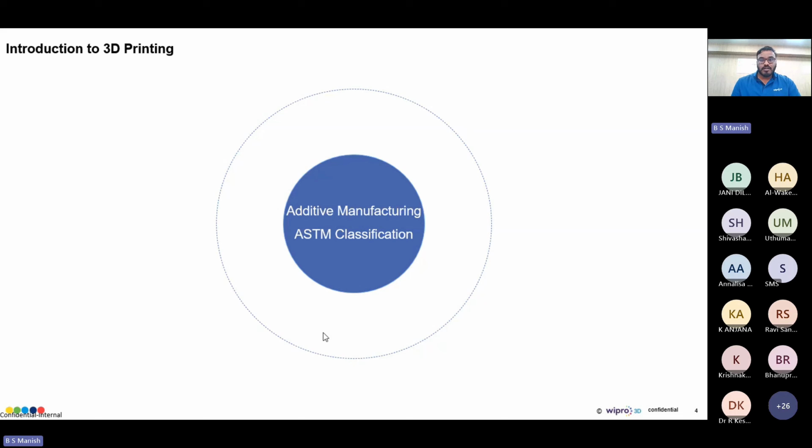So to begin with, I want to brief you a little on 3D printing altogether. We all know additive manufacturing, or AM, is changing the way we think about how we make things. For people who are very new to AM, I'll take it a little basic and go across all the different categories of AM as classified by ASTM. It is categorized into 7 major categories, and each one works differently.

Today, I'll walk you through all 7, how they work, where they are used, and why they matter. I will specifically focus on polymer technology, more on material extrusion, and then take you through various case studies and some of the industrial challenges, solutions, and the value that has been brought.

So let's start with vat polymerization. If you want to understand vat polymerization, you should basically picture a tank filled with liquid polymers. You basically have a laser or a projector that shines light in a specific pattern in a specific area, which cures the resins layer by layer. The resin will be in liquid form, and once it's exposed to this laser or UV rays, it converts or solidifies from liquid to solid. So it's like drawing light inside a pool of liquid.

Technology like SLA, stereolithography, and DLP, digital light processing, use this method. The result is parts come with incredible detail and smooth surfaces, and it's perfect for jewelries, prototyping, dental models, and some end use applications in automotive. In fact, there are various materials that have come into the polymer space that are actually being used in functional end use cases.

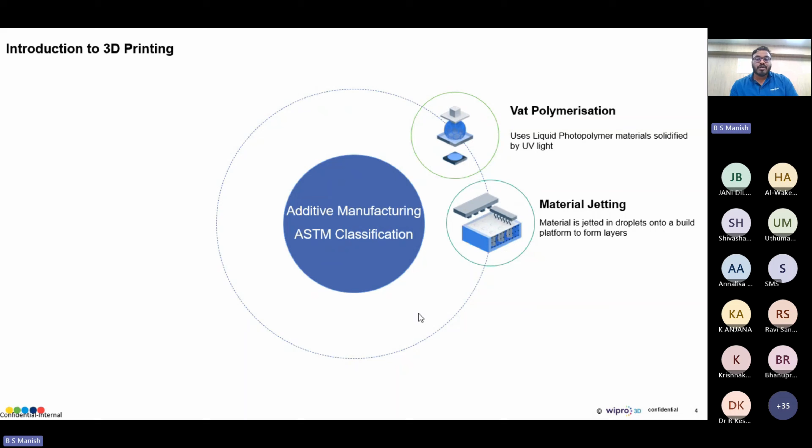However, there are some downsides, the main one being it's a little expensive, and it's limited to certain materials. There are no wide varieties of materials in material jetting, but materials like nylon and compositions of nylon are available, and thermoplastic polyurethanes are available, where the prototype itself makes it look and feel like the final product. That's something unbeatable in material jetting.

Next, coming to binder jetting. Here, basically, we start with a bed of powder. It could be metal, sand, ceramic, or polymer. A liquid binder is sprayed and glued together so that these powder particles bind together in the specific layer, and this repeats layer over layer.

After printing, the part is mostly a little fragile. So there's a post-processing technique called debinding and sintering, which makes the part more rigid and usable for end use application. I have also seen materials like sand molds being made, and also some metal parts possible using binder jetting. It's fast and cost effective compared to other metal printing technology, comparatively cheaper and easy to handle. Of course, handling powder is still a little challenging in these technologies. And with all these extra steps of post processing, the strength comes with it.

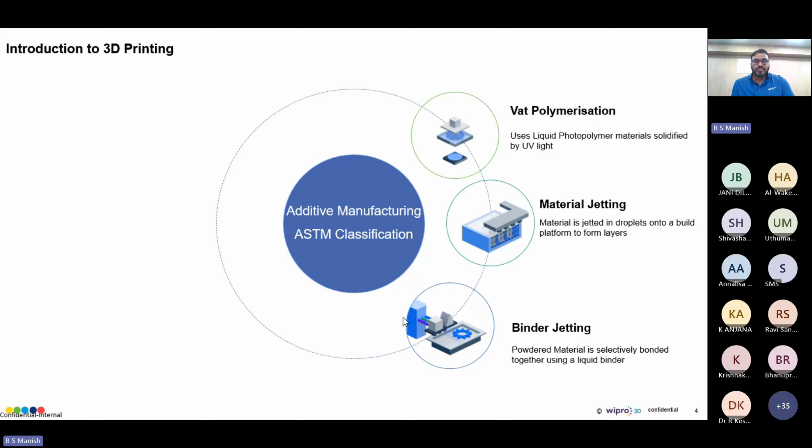Then you have something called powder bed fusion. This is where SLS, SLM, or EBM processes come into picture. In this process, a laser or an electron beam fuses powder particles together on a powder platform. This is actually a workhorse for both metal and polymer parts. You get strong, functional, and precise parts, and you can also make aerospace grade parts, medical implant grades like titanium, and high performance automotive parts often come from these processes.

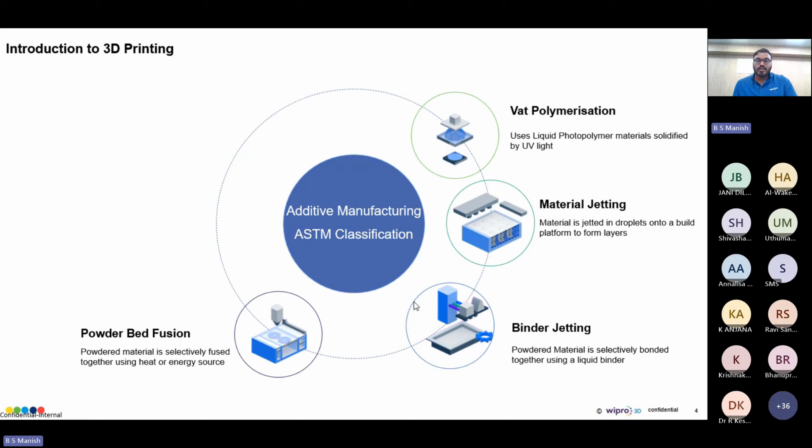And powder bed fusion has a bit of a challenge where it's a little expensive. It needs a controlled environment, and handling powder safely is a little critical. So this is where powder bed fusion comes in. And the next is sheet lamination.

In sheet lamination, you basically have sheets of material. It could be paper, composites, polymer, or sometimes even metal, which are stacked and bonded together using adhesives or through welding or laser. It's being cut, and then there's some adhesive that joins them together. Whatever excess material is cut away to form the required shape, layer over layer, to get the part out. This is specifically very good for making large parts quickly at a very low cost.

So laminating is basically like laminating sheets of metal or polymer together. Of course, there's a trade-off in this technology where the mechanical properties are not as strong compared to other methods, and complex designs are still a bit of a challenge. It's not possible in this technique.

And the other one is direct energy deposition, or DED. This basically mainly focuses on metal powders.

It's basically a laser or an electron beam that melts the materials as it's being deposited simultaneously, or it could be a metal wire which is fed through the melt pool.

DED is actually fantastic for repairing parts and adding features, even for large scale parts, like aerospace parts. This technology is the go-to even for repair of certain aerospace components. I have seen repairs of turbine blades instead of completely replacing them. But of course there's a downside where complexities are involved, or where precision is needed, or a good surface finish is required—then this technique mostly requires post processing beyond the deposition.

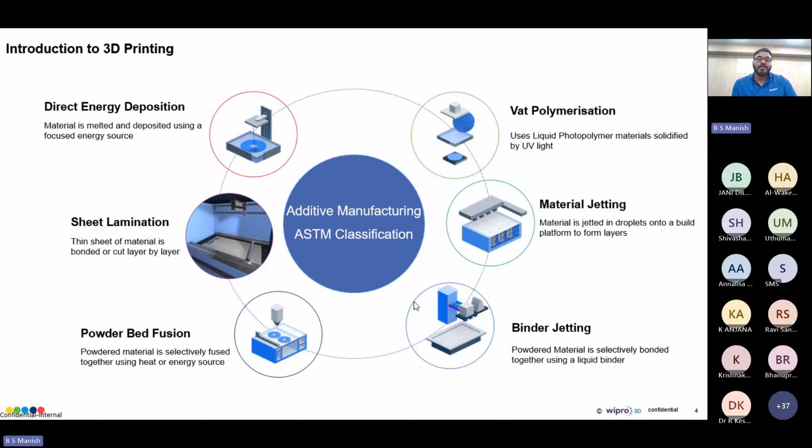And last but not least, material extrusion, which is the most widely adopted and widely known technology. It's either called FDM or FFF—fused deposition modeling or fused filament fabrication. This technique basically pushes thermoplastic filaments through heated nozzles, building parts layer by layer, line by line. In fact, this is the most accessible and affordable AM process.

It's extremely great for prototyping, and advancement in this technology has come so far that it's being used in custom jigs, fixtures, low volume production, and end use applications. Of course, there are a few limitations where the accuracy and surface finish aren't as great compared to other technologies, but for a quick and cost effective solution, it's hard to beat. This is the technique you need to go with.

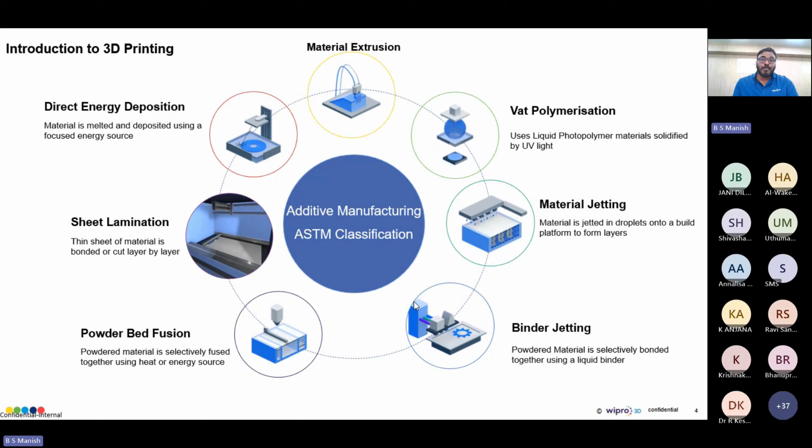So in today's session, I'll focus mainly on polymers and the value that polymer printing brings to industries, specifically the material extrusion technology.

Polymer 3D printing has evolved from a prototyping stage to mainstream manufacturing solutions, because the global additive manufacturing market is projected to reach billions in the next few years. With polymers leading the charge due to their versatility and cost effectiveness, it drives demand for customization, lightweighting components, and sustainability—since certain thermoplastics can be recycled. Industries like automotive, aerospace, and healthcare are rapidly adopting this technology at scale. That's what we're going to discuss today.

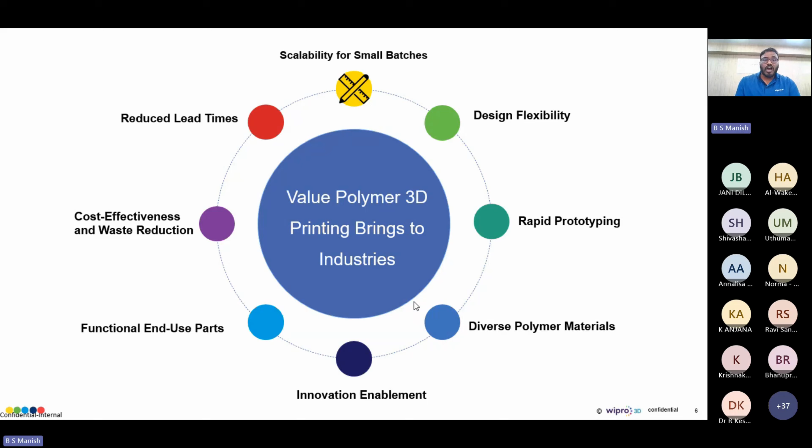So if you look at the values, I'd focus mainly on eight key values. Polymer 3D printing is not just about making parts—it's transforming how industrial design can be taken up to end use application. These eight key values are: design flexibility, the ability to rapidly prototype, availability of diverse polymer materials, innovation that has come through these materials, functional application, cost effectiveness, reduction in wastage, and reduced lead time. So these eight critical points are what I'm going to talk about, and how value is driven in different industries.

If you look at the first, design flexibility—traditionally, manufacturing often limits creativity because of tooling and machining constraints, and these barriers are removed by polymer 3D printing. Imagine creating a part with internal cooling channels, or wanting lattice structures—things that would be extremely impossible or very costly with conventional methods. For example, in automotive, engineers print complex air ducts that improve airflow without adding any weight. In those cases, 3D printing definitely comes into the picture.

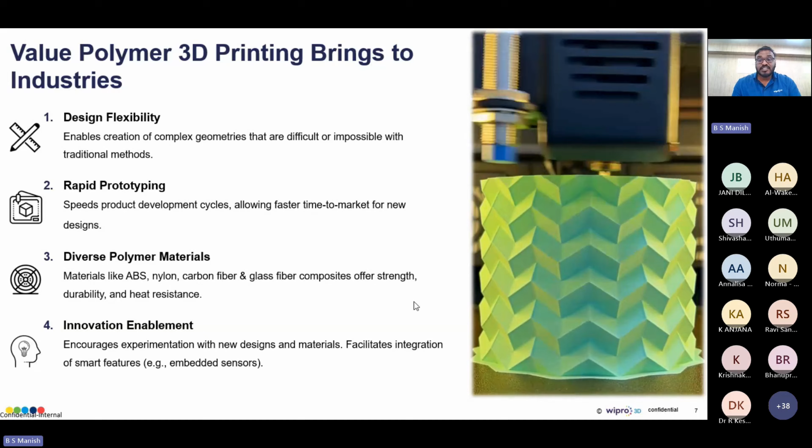And if you look at the medical sector, patient specific surgical guides are printed to fit the anatomy of the patient—that flexibility is what it delivers in your design. This way you can focus more on performance and innovation and not just be limited by manufacturing limitations.

Second is rapid prototyping, which is widely adopted across industries and very critical in product development. We use it day in and day out for rapid tooling and prototyping, and it allows you to go from concept stage to physical parts in hours instead of weeks—literally in hours. Think about consumer electronics companies and certain end use applications where you want to test and feel the parts. We've worked with certain companies building pods that help realize their designs quite quickly. So instead of waiting for molds or tooling, printing these parts overnight and testing them the very next day, iterating very quickly—the speed of development is extremely high, the cost is extremely low, and it really accelerates time to market.

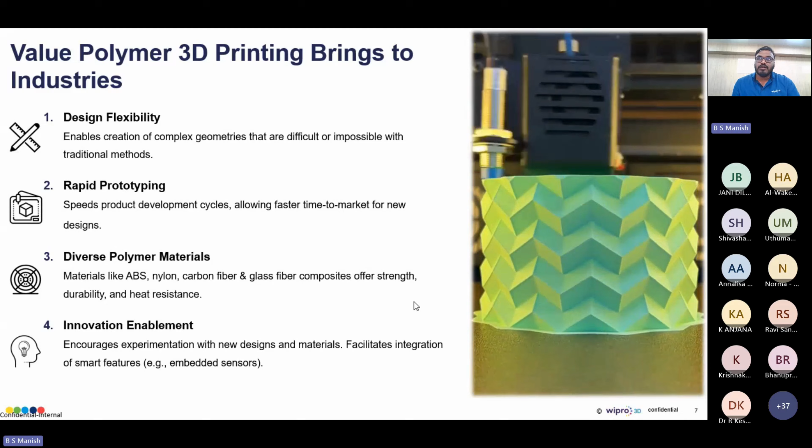That is why industries like aerospace and automotive rely heavily on polymer 3D printing during design validation. Also, if you look at the availability of materials, there are diverse polymer materials available. We're not just limited to basic plastics anymore, because when polymer printing started, it was very much limited to PLA and ABS kind of materials. But today, polymer 3D printing offers materials that are heat resistant, chemically stable, flexible in nature, and even biocompatible.

In fact, in healthcare, biocompatible polymers are used in implants and even prosthetics, so it needs to be skin friendly and implant friendly. And high performance polymers like PEEK, Ultem, which can withstand high temperatures and very harsh environments—all that is possible mainly because of the availability of material. So there is wide adoption in this polymer space.

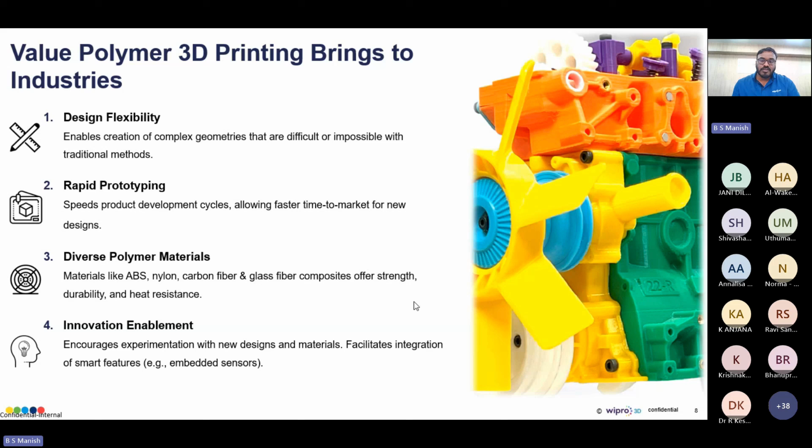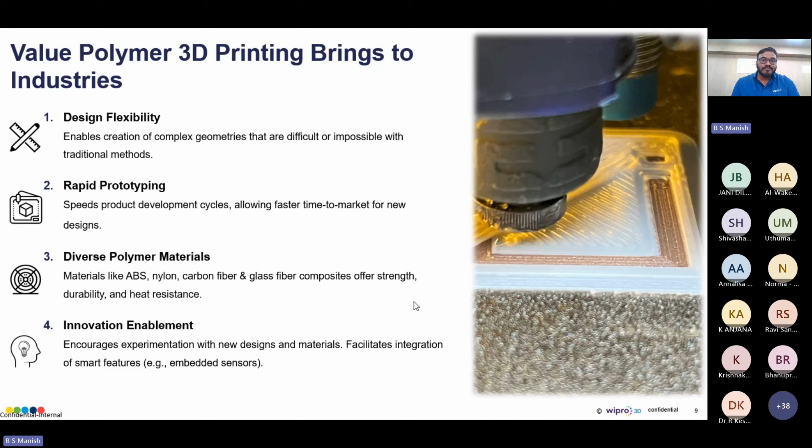And of course there are more innovations happening in this sector. We also have functional end-use parts where 3D printing has gone beyond prototyping—today industries actually produce end-use applications. There are companies using custom-made brackets for bikes and certain plastic parts, which were conventionally made, now rapidly iterated using 3D printing.

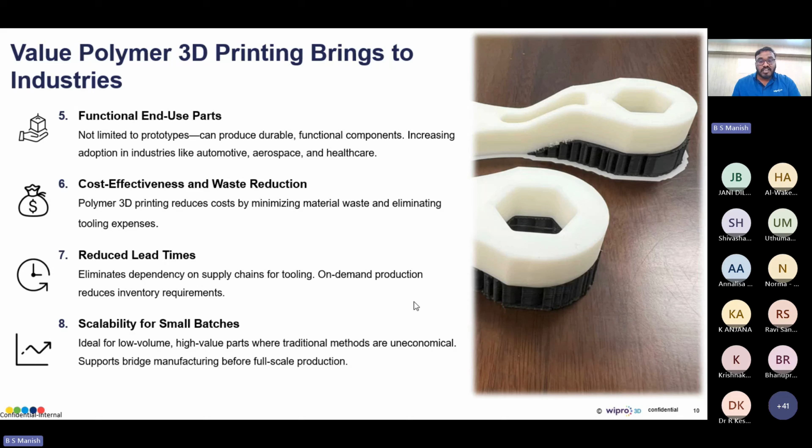Since the technology itself is so affordable and available, the amount of waste being produced is quite less. In fact, if you compare with conventional manufacturing, tooling expenses are significantly high, and the amount of material wastage is quite enormous. That is where printing has come into picture, and the need for quick iteration, quick prototyping, without losing or wasting material—and you can quickly recycle material. In fact, there are certain thermoplastics available which can be quickly recycled. So that is a win-win situation, giving you an edge over sustainability as well.

The other thing is also the overall lead time. If you look at how industries used to work, there was always a bottleneck because of the timeline it takes to produce parts. Now, introducing 3D printing into their industry has eliminated that bottleneck, and parts are produced on demand. Also, no more inventories are kept—when there is a requirement, people can print, produce, and send as and when required.

Even for scalability, from small batches to significantly high volumes, you can definitely go with 3D printing, which can also be beneficial in terms of cost. And it's okay to run small batches because not every sector needs large volumes—they also work in short batches, specifically in the medical industry, where it's tailored to a specific patient, or even in consumer products where you want to personalize things. So companies can produce exactly what is needed, when it is needed, without overstocking or wasting resources.

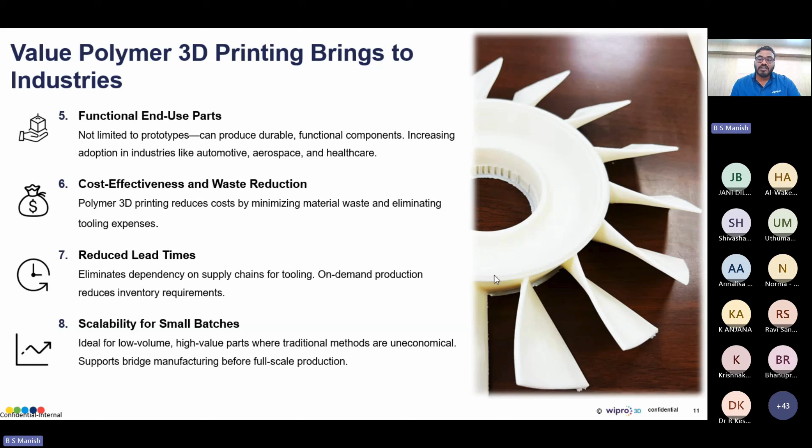So these 8 key elements or values are why polymer 3D printing is actually transforming industries. It's not just about making parts, it's about rethinking manufacturing for the future. That is where the industry is going.

Now that we've explored the values it brings, let's see how industries have actually taken up 3D printing and leveraged polymer 3D printing to come out with success stories. I'll give you some real-world success stories and examples of how polymer 3D printing has transformed industries from the ground up. Let me take you through one by one.

So in other words, the team weren't able to actually simulate how the braking system would behave in the real world before putting it into real service, right? So this led to repeated failures, costly downtimes, and it literally brought frustration on the shop floor. So every breakdown meant production delays and increased maintenance cost. So here's where polymer 3D printing came into the picture.

Instead of waiting for expensive metal prototypes or relying on some theoretical calculations, the team quickly decided to rapidly prototype the braking system component using polymer 3D printing, and ran multiple design of experiments to test different geometries, tolerances, and assembly configurations, because polymer 3D printing is very fast. It's cost effective. So you can put the part for print today and you can get the part tomorrow.

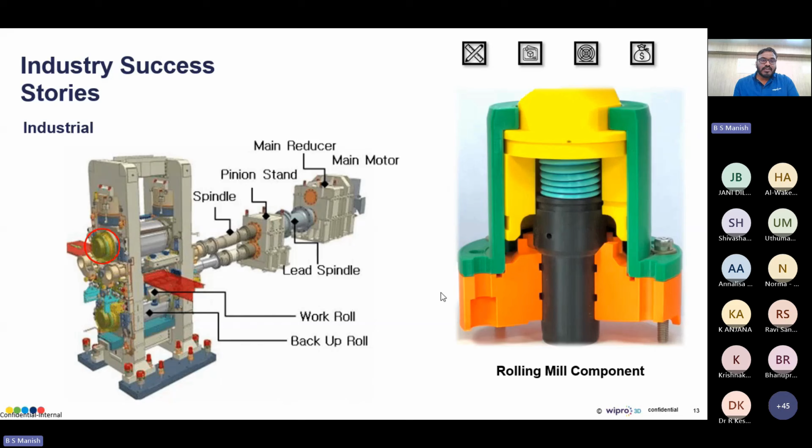And next, we also have a story or case study of a hydraulic manifold. So it's another very interesting story. It shows the power of polymer 3D printing, where it has solved a complex engineering challenge. So the challenge here was integrating and validating a new manifold design.

and the cost, time and money wasted is tremendous. So in this case, the team needed a way to evaluate multiple design options quickly without committing to any full scale production. So here's where the printing came into the picture. Instead of waiting weeks and months for prototypes, by printing these parts, the manifold geometries were evaluated quickly,

and the internal channels, the layout, even multiple material options were evaluated, because nowadays materials with different configurations are available, for different strength requirements. All of this was possible within the same machine in the shortest time frame, because of, you could say, the availability of this technology right now.

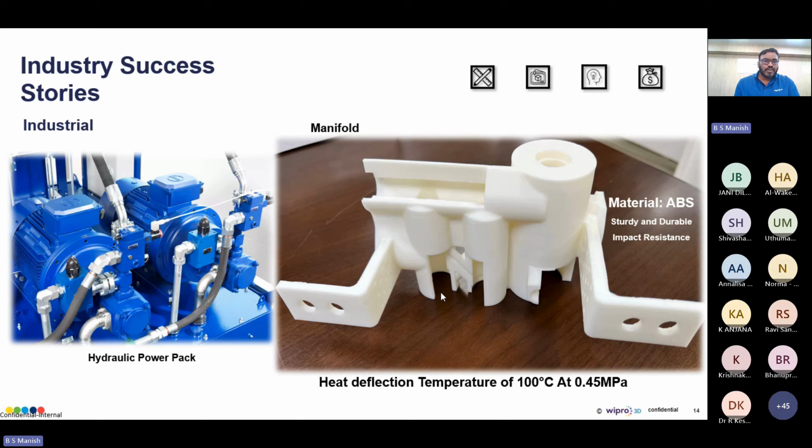And next, we also have a story from the healthcare sector. This actually played a life-changing role in surgical planning. This case involves a patient with a tumor in his bone, and the challenge was to plan the surgery with absolute precision. In complex surgeries like this tumor removal, precision is everything. They need to identify exactly where they need to cut and replace this tumor.

Traditionally, the planning used to rely just on 2D scans and surgeons' experience, which can lead to a lot of uncertainty and risk, longer surgery time, and a higher chance of error. Also, it is difficult to achieve perfect alignment for the reconstruction. So here's where the technology stepped in. The team started by 3D scanning the patient's anatomy, capturing every detail of the bone and the surrounding structure.

Using this data, they had designed the custom cutting guides and drill guides tailored to the patient's specific bone geometry. So these guides were then 3D printed using polymer, allowing the surgeons to actually physically hold and test them even before the operation, right?

So the approach has actually given the team a clear roadmap and visibility on where to cut, how to remove, how to position, how to replace, transforming the planning from simple guesswork into a precision rehearsed process, right? So the surgery was much faster, much safer, much more accurate, and the tumor was removed successfully. And after reconstruction, there was a perfect alignment, and that is how the industries have started to adopt this technique.

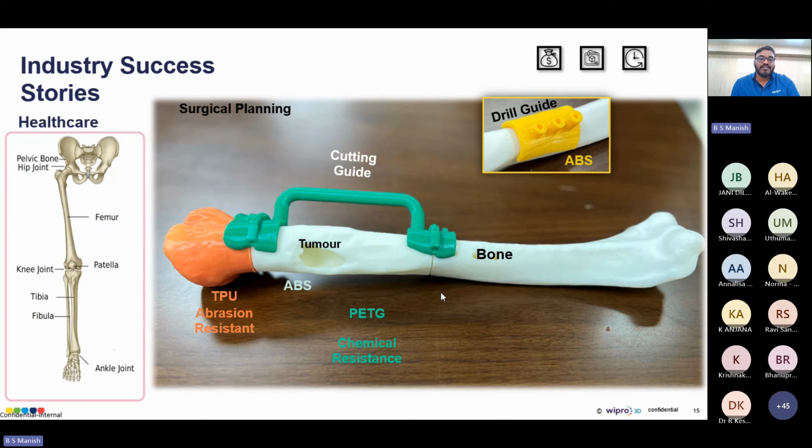And if you look at another segment similarly, which is being done widely, again, is pelvic bone replacement and reconstruction of the pelvic bone. So this also is similar, where they had to rely on 2D imaging and the surgeon's experience. Now with 3D printing in hand, they're able to visualize where exactly the issue is, and how they can optimize the design for implants. In fact, now there are metal implants and polymer implants available that go hand in hand with 3D printing, and all these are printable, and they're also biocompatible in nature, a very good use case of this technology altogether.

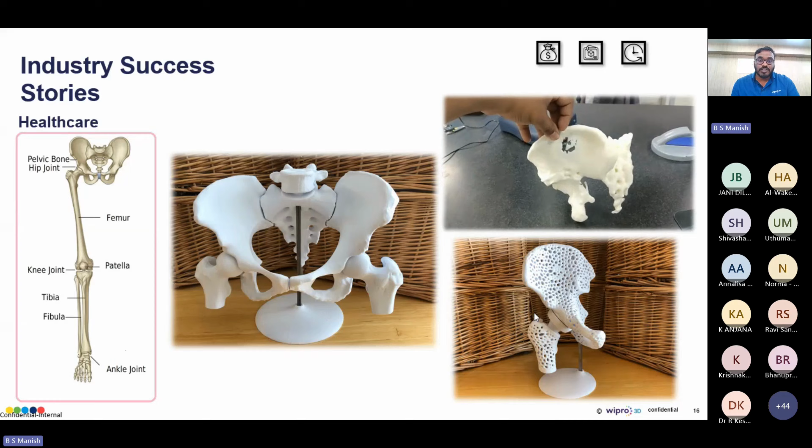And then we also have a case about the aerospace industry, a company that mainly works on drones. And if you look at aerospace or the drone manufacturing sector, every gram matters. So the challenge here was to produce a structurally good component which is lightweight, yet strong enough to handle the high loads and vibration during flight, right? So traditional machining of aluminum was an option, but it adds weight and it requires tooling. And if you consider injection molding, then the lead time and the cost for low volume production are very high.

So the team needed a solution that combined strength, lightweight properties, and design flexibility, and this is where they turned towards polymer 3D printing with carbon fiber reinforced composites. You also have glass fiber and other things. In fact, in my previous organizations we were using glass fiber composites, but all those were conventionally made. It used to take a tremendous amount of effort to build these frames. Now with 3D printing, the design can include internal lattice structures. You can optimize the geometry for aerodynamics, which is not possible with conventional techniques. And in the end, a functional end use part can be printed and used.

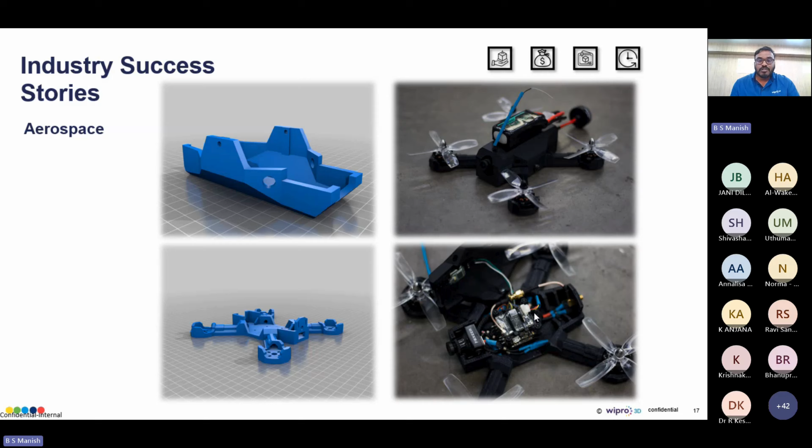And next, coming to another success story, this is with one of our customers. They work in the e-mobility sector, specifically on electric vehicle related components. So they use 3D printing for fitment checks and visualization, and they are also using materials like ABS in end use applications, such as cooling system parts and protection covers. In fact, they have printed large parts that take about 60 hours without interruption, which are then used in their end use applications. Again, a very good case of polymer 3D printing in end use.

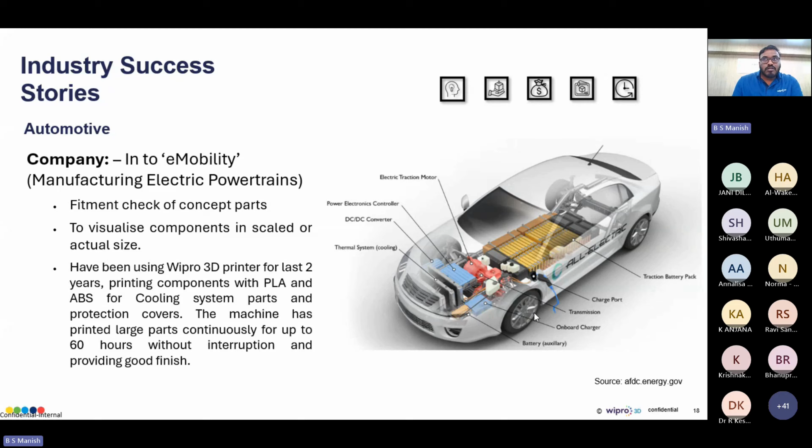So with this, I would next like to take up some of the innovation enablers. If you look at polymer 3D printing, be it reducing lead time or being able to do complex designs, beyond all this, what is actually driving this transformation and where is it headed? That is where we're going next. In this section, I'll talk a little bit about the innovation enablers and the future landscape, and we'll explore some of the key factors pushing polymer 3D printing forward as a core part of production strategies. So let's dive into these.

If you look at the enablers, we can categorize them into four segments. The first would be the model. The model is an enabler, in how the design is developed, and you cannot always go with CAD models created for machining and molding, which don't really translate well for additive manufacturing. And that is where design for additive manufacturing comes into the picture.

Then we also have the software that impacts it. In software, if you look, the build preparation softwares play a major role in enabling this technology. And next comes the material. Again, material is also very critical. The quality of material, the source of these materials, how well it's blended, and the kind of compositions that come out of it eventually affect the overall quality of the printed parts.

And last, the machine itself. Like, even if you have the best design, the best software, and the best material, the machine is the one that is going to enable the printing. And having a robust system to be handling all of these is what is very critical. So I'll take you through each one of this in detail.

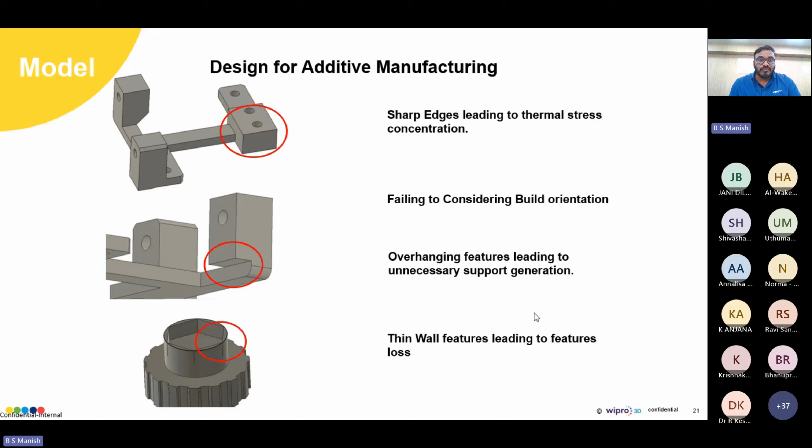So that is where DFAM isn't just a design method, it's a mindset shift. You need to shift your mindset towards building functional parts which can make use of the complete full potential of AM. So then you will get much lighter, stronger, and more efficient parts if you compare it with conventional techniques.

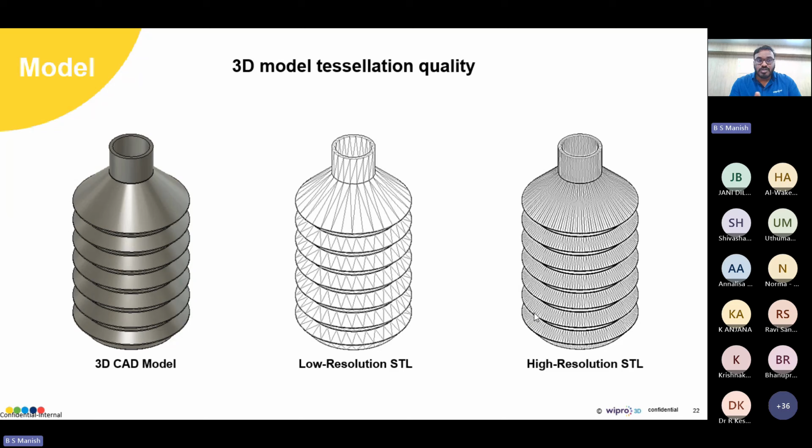And then the next thing is, if you look at the model, even the model's tessellation quality plays a major role. Usually the process starts from model to an STL file, or the mesh file. And when you're doing this conversion, if your STL resolution is very low, that also can impact your part outcome. So that is also a little critical. Again, there's a balance between high tessellation versus the quality that is required, because if you end up overloading the tessellation, then it will eventually overload your softwares as well, so you need to find the right balance between the resolution and the quality that you desire.

And also, once you adopt methodologies where you are doing reverse engineering, or 3D scanning, there can be certain elements. In fact, if you see one of the previous medical models that I showed you, it comes from a scan. So there could be some missing elements, there could be some errors in the scan.

And when you look at STL errors, the two common ones are non-manifold edges and intersecting faces. Non-manifold edges are basically where you have an edge which is shared by more than two faces, and when there is a hole in the mesh. You can think of it like a leak in a water tank. If the surface is not watertight, then your slicing software will not be able to figure out what's inside and what's outside. And then you will have a disconnect between the surface, overlapping shells, and intersecting faces. If you don't get the STL, the mesh, right, then it may lead to errors in the end part.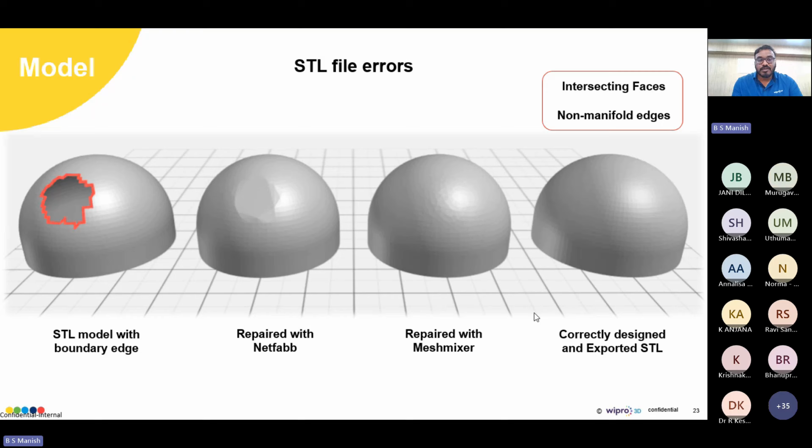And then if you look at the next, that is the software. When we talk about software, the software is actually the brain behind the printer. It actually converts your 3D model into instructions that the machine can understand, right? So the entire magic lies in the printer parameters. Setting them will directly affect your quality, your strength, as well as the speed.

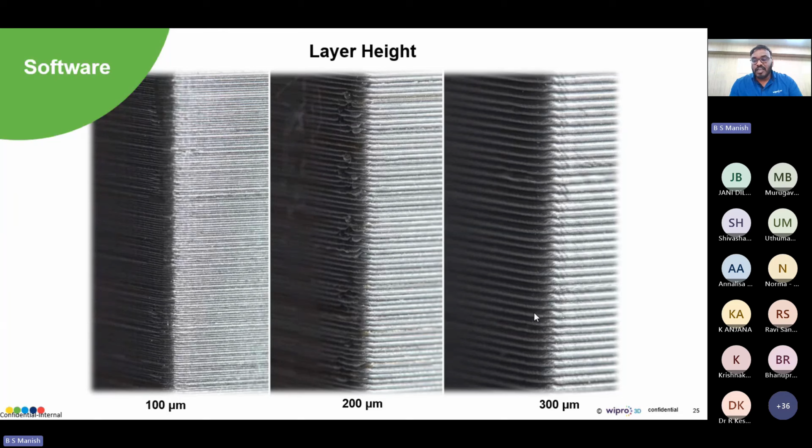So for example, layer height would vary between 100 microns to 300 microns. That will impact your surface quality. So finding the right balance between your application and the speed at which you need them is going to be a game changer. And then the infill density. Not all parts really require solid fills. Certain parts you can maybe do 20% hollow, 30% hollow.

You can also add different structures. Maybe it could be honeycomb, triangular, lattice, rectangular parts. So if you go with prototyping, then lower infill density makes more sense. And then if you go with much more functional and stronger parts that you require, then again you can identify the right pattern density and go with the strength and efficiency there.

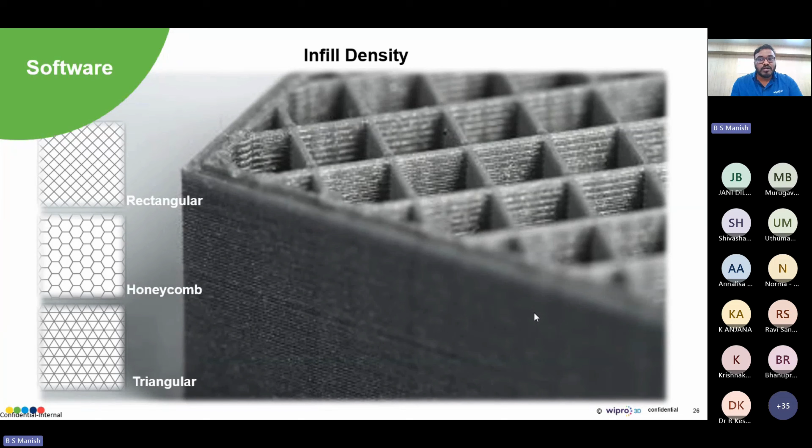And then again, your orientation, finally, how you position the part also is going to play a major role. And the surface finish, if you look at circular features, the best orientation is actually vertical. But if you go with the horizontal orientation, then you have a limitation where the circles are not circles anymore. It becomes a little bit oval or like a teardrop. So in short, software and its parameters like layer height, infill density, or the orientation, and various other parameters within the software, they are the key to balance between speed, strength, and quality.

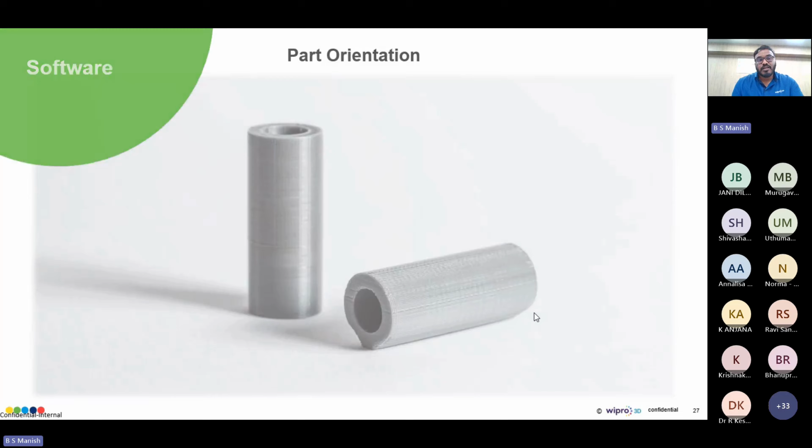And coming to the next enabler, that is the material. When we talk about material extrusion, the choice of material is also going to be a game changer, because that will determine your strength, your flexibility, or if you need any heat resistant component, or if you need any functional part, if you need impact resistant part.

If you look at the earlier days, the thermoplastics like PLA and ABS were the most demanding and being used. But now the industries have moved towards composites, polymers, high performance polymers. So it's definitely going to impact the overall performance of your part. So choosing the right material is the key. And if you don't opt for the right material, and if you compromise on it, then you may end up with uneven surfaces, uneven textures, stringing kind of effects.

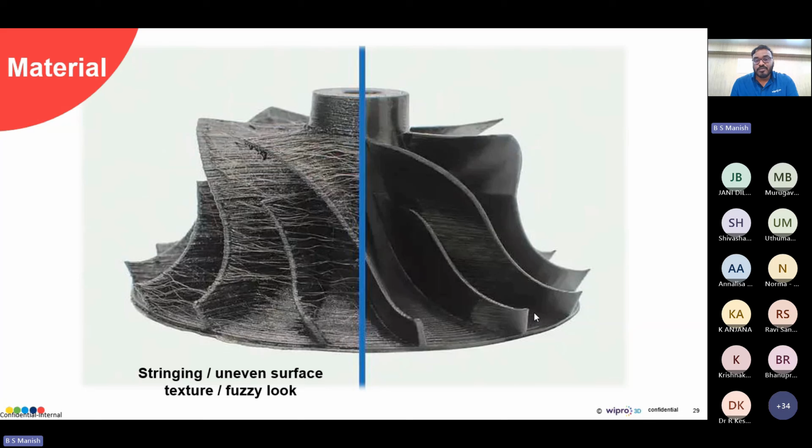If you look at the image, when the quality is not good, or if there's a lot of moisture absorption, for example, in materials like nylon, PETG, they are very hygroscopic in nature. They absorb moisture from air. Even if you leave it for a few minutes, they capture moisture very easily. So storing the filament in the right manner, drying them, and making use of it in the right manner is very important to get usable parts and stronger parts.

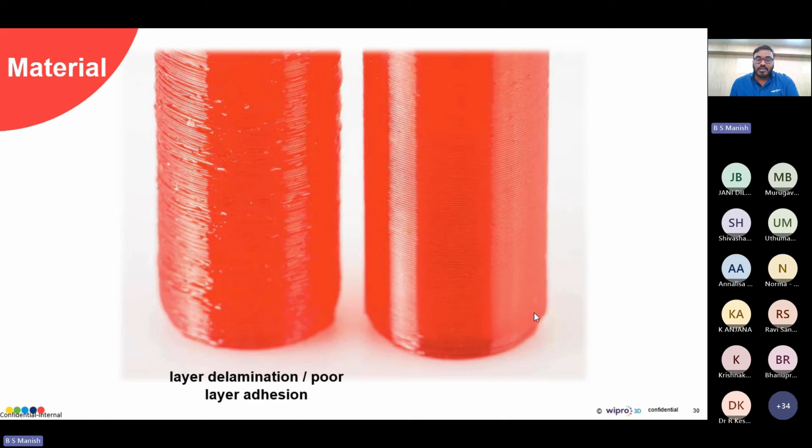And then you will also come across impurities in the material. You will not really know by looking at the material, but there can be impurities in the materials, whatever fillers are being added, which are mixed during the manufacturing stage. And that can eventually affect your print. It could clog the nozzle, it could disrupt extrusion, it could grind the material, blobs can come, layer delamination can happen. So always choose high quality filaments from trusted suppliers, and don't bargain on a brand that compromises purity, because that is what is going to affect your functional parts, right?

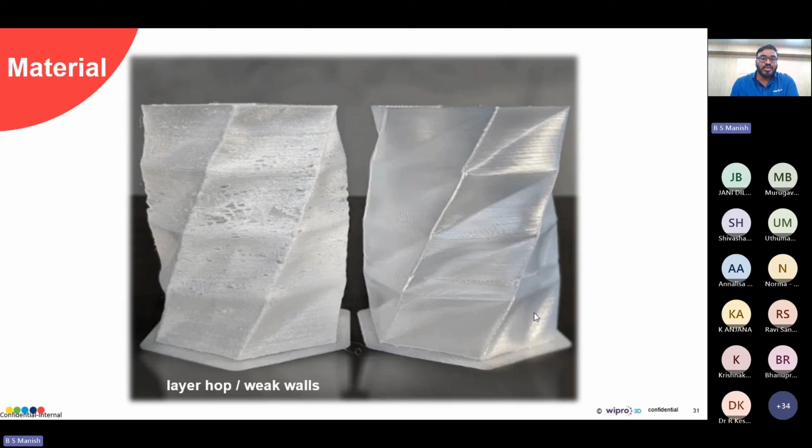And then you also have inconsistency, maybe in the diameter of the material, or the kind of material being used. That also can lead to weak walls when you're printing thin features. So those kinds of elements will definitely affect your overall part. So always go with filament that has strict quality adherence, tight manufacturing tolerance, consistent compositions, and also go with premium grade materials, so that you will have predictable melting and smooth flow of the material in material extrusion technology specifically. That will really change the way you use 3D printing for your application.

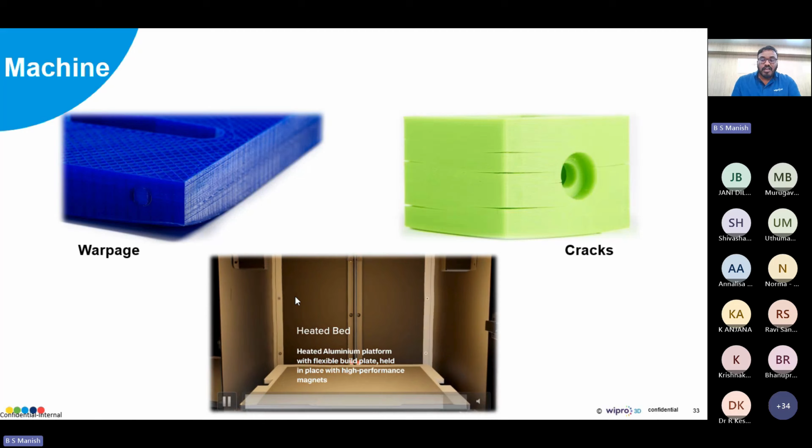So features like a heated platform and heated chamber will regulate the way the material behaves within the machine, the way the parts are being printed, and eventually it ends up affecting your overall part quality. And one of the major challenges that you will actually face in material extrusion is layer adhesion. With poor adhesion, well, 50% of the job is done if your adhesion is right. So getting that right is what is very important.

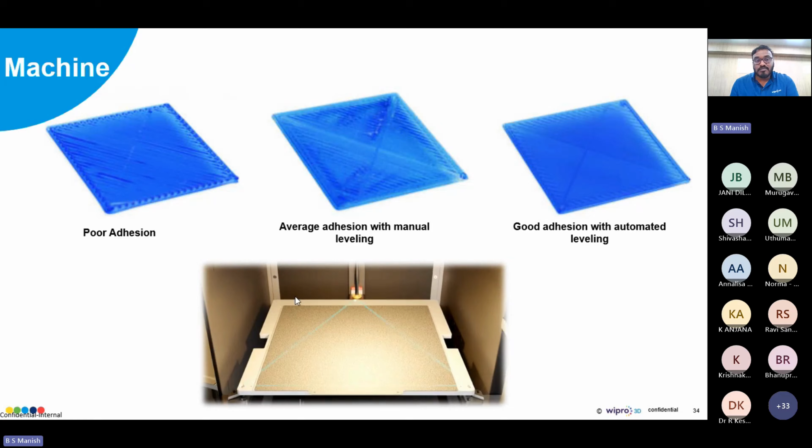And to enable that, you need to have systems that are intelligent, that are smart, that are capable to handle the platform leveling when you're going with large parts, large platforms, edge to edge. If you want to print edge to edge, then platform leveling is the key. And having features like mesh leveling, kinematic leveling, those are the ones that will actually eliminate your challenges that you face with adhesion.

And then coming to issues like vibration, ringing, like you've seen in the images, ghosting effects. These are directly impacted by the machine itself. So how good your gantry system is, how well it is built, if they're using precision rails, or if the mechanisms are belt driven, what kind of actuators you use, what kind of motors you use, all those machine related components, the gantry related components, are going to be very critical

in terms of the machine, because there should be no compromise, because this is a moving part. In the moving part, there should be no compromise, and that is where your gantry system is going to come and help you in delivering consistent results back to back. That repeatability will be possible only if you have a robust mechanism.

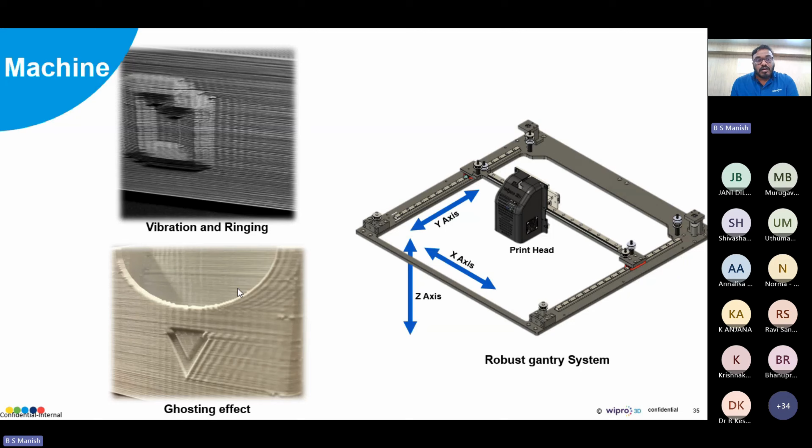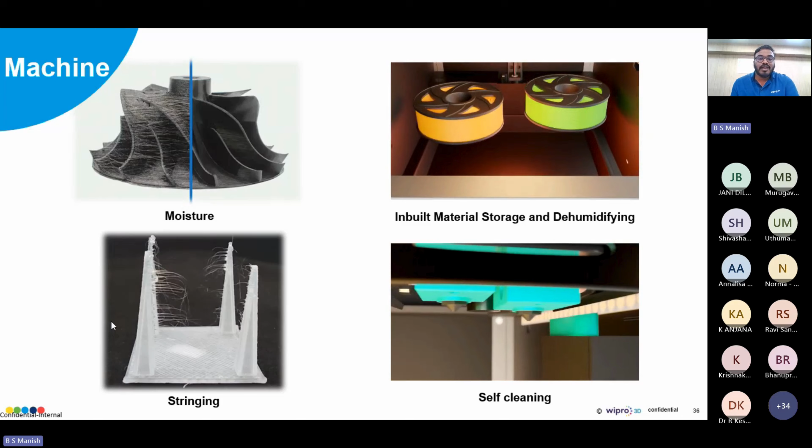And then again, even if your material is good, you still may sometimes face moisture related issues, because the material itself is like that. If you consider PLA and PETG and some of the nylon materials, they are by nature hygroscopic, so they will absorb moisture very quickly. So having the ability to dehumidify them or store them in a manner that they will not absorb moisture will really help in getting the best results.

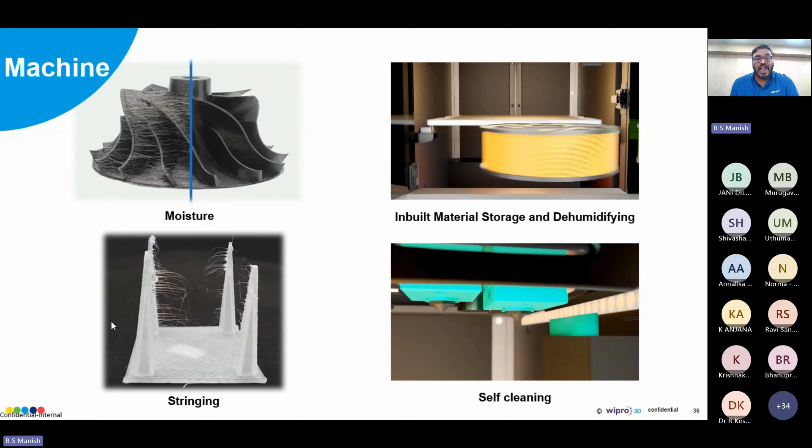And then again, stringing also is material related sometimes, and sometimes your machine also should be able to handle that. That is where certain self-cleaning mechanisms can really come into the picture and help you eliminate these kinds of issues. So on the whole, these four enablers are extremely important in material extrusion, specifically in FDM and FFF technology. These are the key enablers that will help you enhance the overall quality.

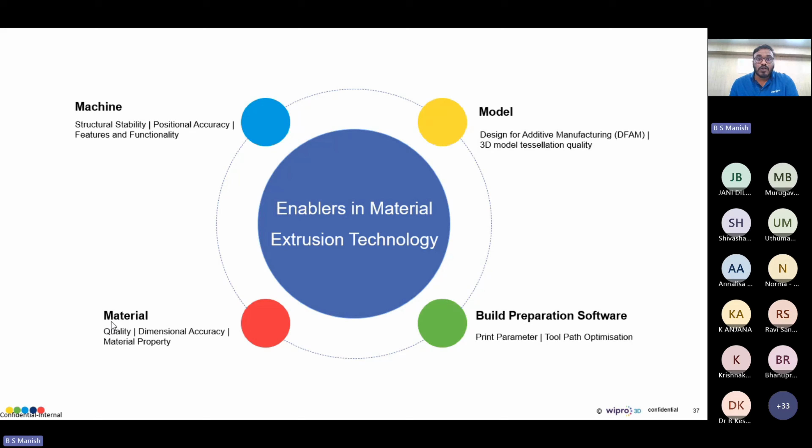Now, next, coming to the trends. If you look at the kind of innovation, material extrusion has already come a long way, because initially it used to be simple desktop printers. Now it is rapidly evolving into different materials, smarter processes, much more advanced technology. The future is being driven by advanced composites, conductive materials, and also certain AI related integrations, process automation, high speed printing. All these are what is going to drive the future in this technology.

So if you look at advanced composites, these carbon fiber composites, glass fiber, nowadays I even see Kevlar based composites, because they combine the lightweight nature of polymers with the strength of fibers, eventually making the part as strong as metal, but much lighter. Aerospace uses a lot of carbon fiber composites. And for drones, like I showed you, structural components, performance parts, all these definitely require advanced composites.

And then we also see conductive materials. So you can imagine printing not just mechanical parts but also components with electrical functionality, right? Conductive filaments will actually allow you to embed circuits, sensors, even antennas directly into the 3D printed part in a single process, in a single machine. That opens doors for smart devices, IoT applications, lightweighting of electronics, where the structure and the circuitry can be integrated in one print itself. It's a game changer for industries like consumer electronics and medical devices.

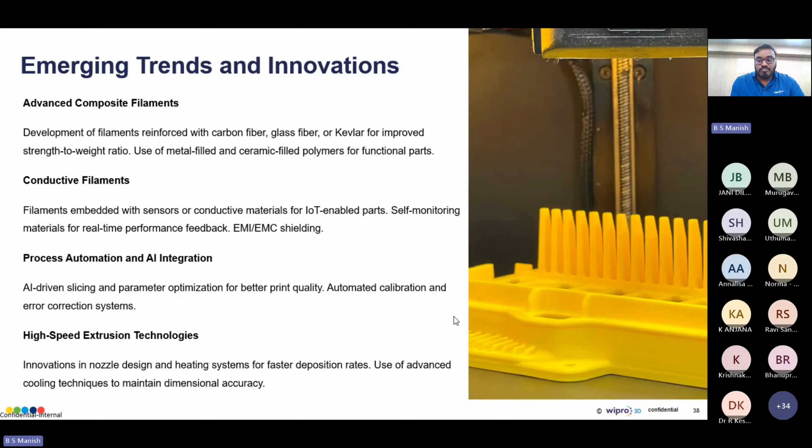And you can see a lot of advancements coming through in the near future. So with this, I would like to conclude by saying just one statement: polymer 3D printing isn't just shaping parts, it's shaping the future of manufacturing.